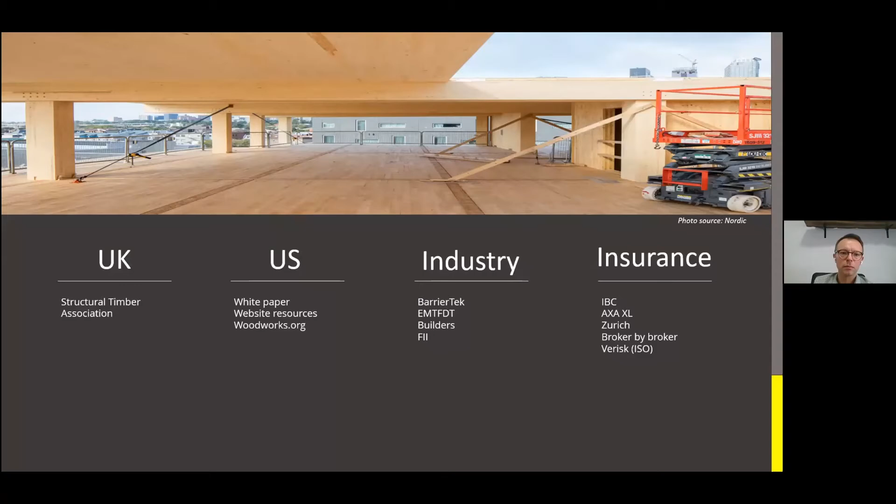So we launched the campaign and called it Insuring Timber, with the goals of engagement and education, and rolled out a Did You Know campaign on various social media channels, which was pretty successful. Just some facts and mythbusters type of thing that led to, for us, really good engagement on our social channels, and brought about some great contacts, which allowed us to move further down the road in terms of education,

again, promoting what we had on our website, and through a preliminary report that I put together with some consultant help called Insuring Timber, that highlighted the key areas and what we plan to do to address them, and continue to engage with industry through specific project meetings, which led us to the thought about how to take the next steps.

And having developed a bit of an inventory of wood-friendly insurance companies, we put together a very in-depth insurance think tank with the companies that you see below. It was a full-day interactive session where we spoke to underwriters, to brokers who are very familiar with wood construction, got their opinions, went in there with no preconceived notions, as did the insurers; nothing was off the table, so to speak, in terms of addressing this issue. So it was extremely helpful and brought about the following conclusions.

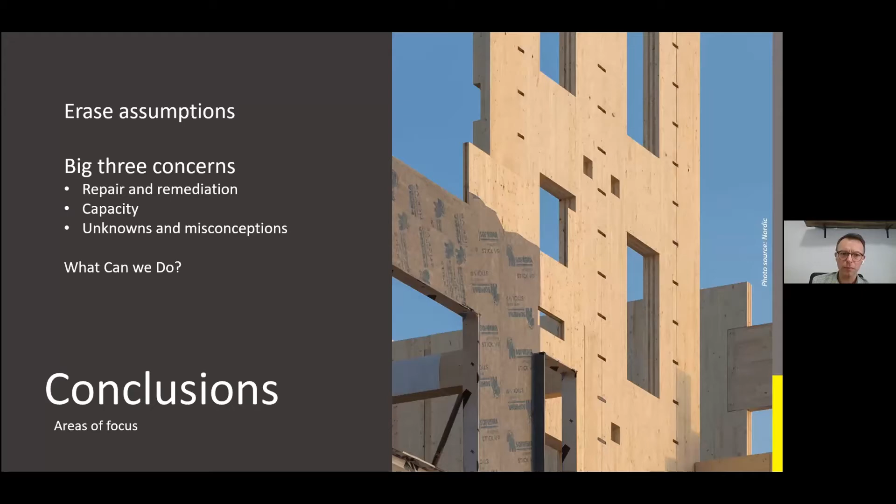So, speaking to insurers, isn't that a good thing? And it is. However, they don't have the data to make accurate conclusions. So as time goes on and this continues to be the norm where there are no issues during construction, then we can certainly use that as leverage. It's a very safe way to build, which it is.

In the short term, in phase 2 activities, we continue to be able to make referrals to some of those friendly companies and continue to hold different workshops with stakeholders and presentations to industry like this one. And the development of a best practices guide, which we'll talk about in a second, to bring about a more friendly application for insurance. And in the long term, we continue to make partnerships and rate reductions.

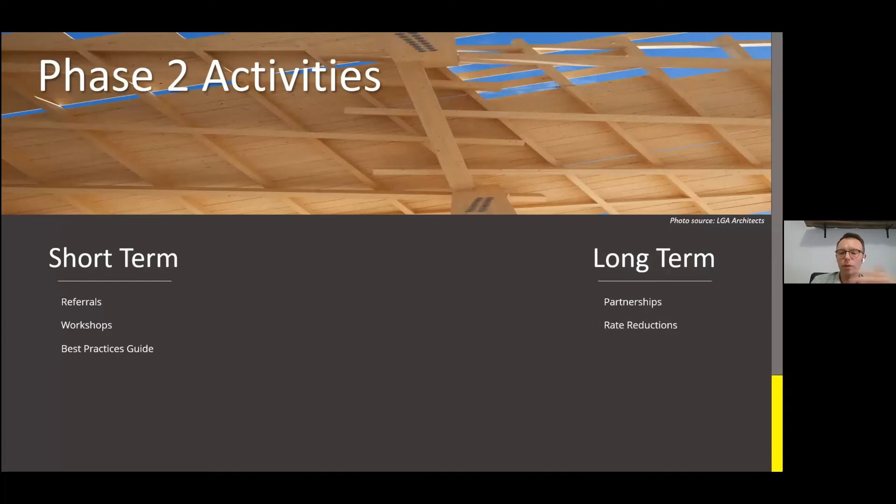So we talked about these misconceptions earlier, and Dan alluded to some: it's going to rot, or it's vulnerable to termites. That's the problem, right? Those termites are going to eat the building and it's going to collapse during construction or after. That's a real problem, but that's not it. That the wood rots, and that's the issue. If it gets wet, it's done. Like you might as well throw the building out. That's a real problem, but it's not.

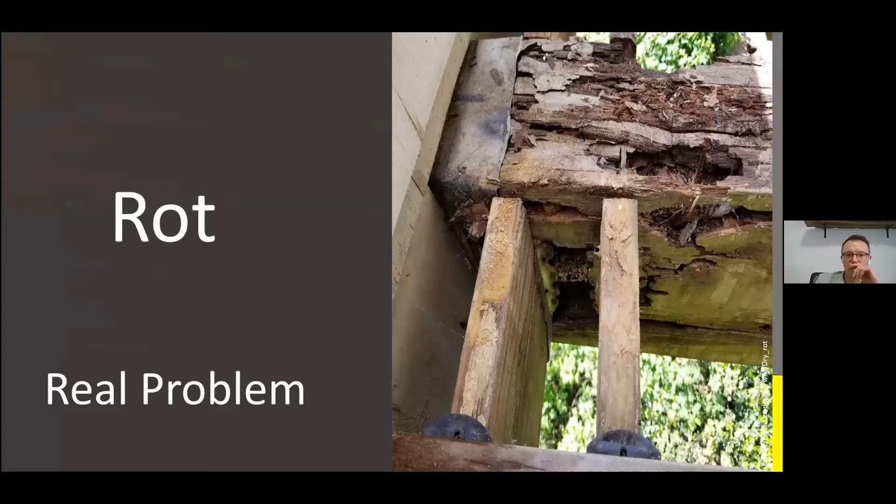Okay, well, maybe it's fire. That's the issue. Wood's vulnerable to fire. That's the issue, and if we can solve that, it's all good. But it's not true. The real problem when it comes to insurance is risk. And for now, timber is perceived as risky, and we'll get into it in a few slides. But in terms of historical data, you can't necessarily blame insurance for perceiving it that way.

Risky business for insurance is not a good thing. So that's why we put together a guideline for insuring timber in Canada. Building with wood is a lot different than it was 50 years ago, even 20 years ago, even 10 years ago. Prefabrication, modular construction, mass timber, these things did not exist.

Like, Dan's presentation mentioned glulam post and beam. And I've been around the industry long enough that it used to be called heavy timber or glulam construction before that mass timber tagline came along. So the structural systems have changed. It's unfamiliar. There's a lack of data. Everyone thinks that wood is wood.

Light wood framing methods are largely standardized throughout North America, with the quality of the lumber, the spacing of the studs, types of lumber used; they vary little between the types of buildings. Assemblies to achieve fire resistance ratings and sound transmission ratings are largely similar.

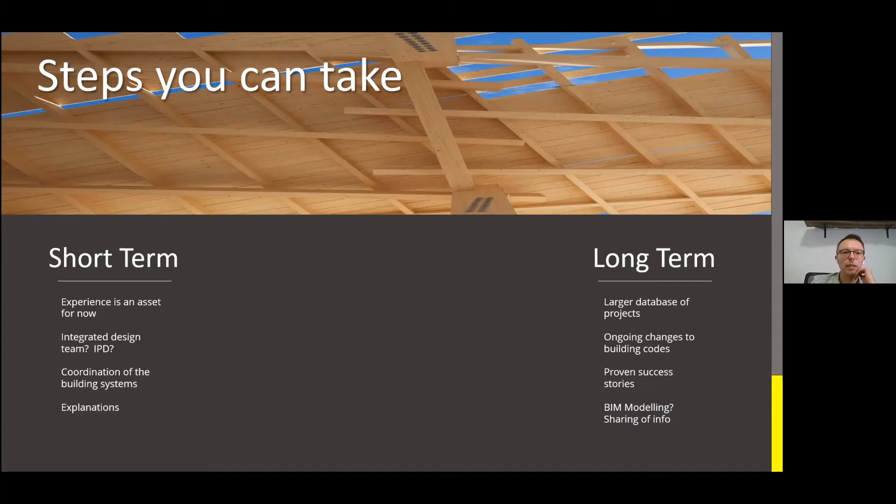And luckily for us, because this is a relatively new type of construction, we have many demonstration projects that are proven success stories with lots of information behind them to draw from, including fire safety plans, including moisture management plans that have been implemented. So just continue to share that info, and it goes a long way to alleviating the concerns of the insurer.

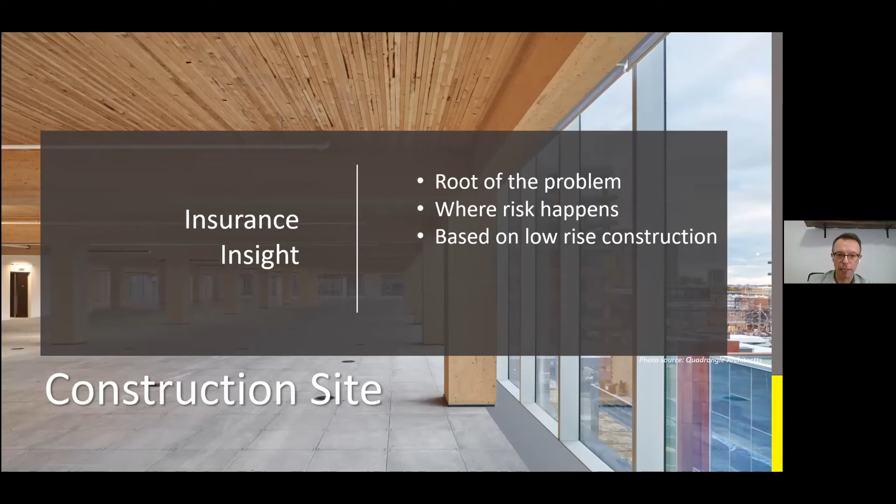The construction site is key, and this is what I alluded to: you wonder why rates are high, I'm about to show you. The site is the root of the problem. This is where risk happens. This is based on historical data of on-site built buildings where, you know, risk is not something that is even in the back of anybody's mind. We can change things like that.

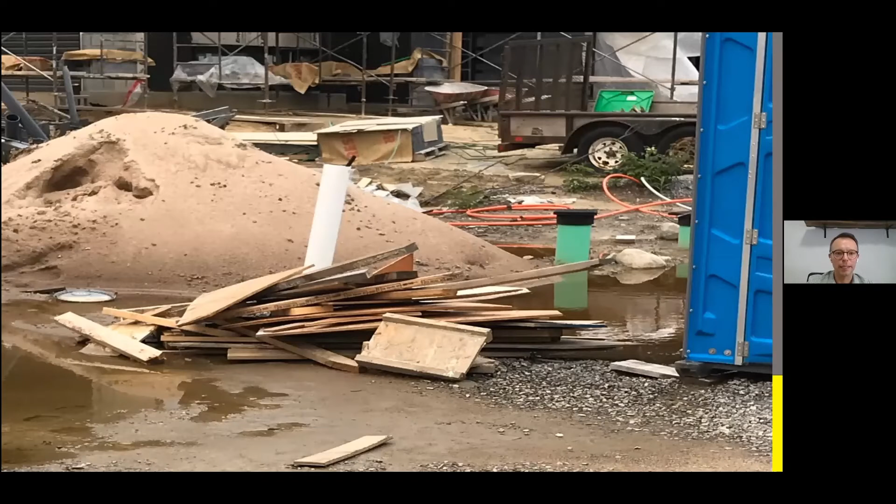And even today, going through a subdivision near my home, which I won't identify, but this is not uncommon, you see end cuts sitting in puddles of water piled up, like, it looks like a campfire waiting to happen. Why is this even occurring on a construction site?

I think somebody asked a question about rain falling on wood. You know, wood can get wet as long as it's allowed to dry and properly detailed. As we just saw, you can use these in bridges that last for hundreds of years if you design it properly. But leaving these risky types of materials just lying about doesn't make a lot of sense. You know, you've got a full bin here.

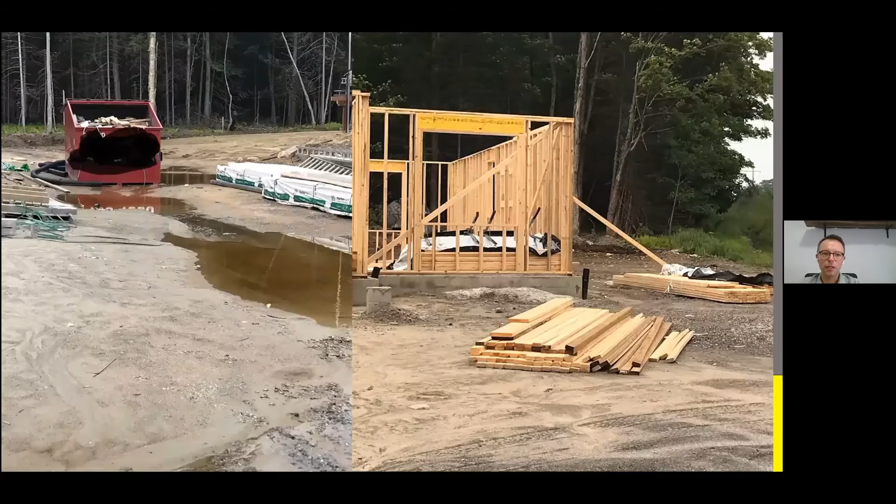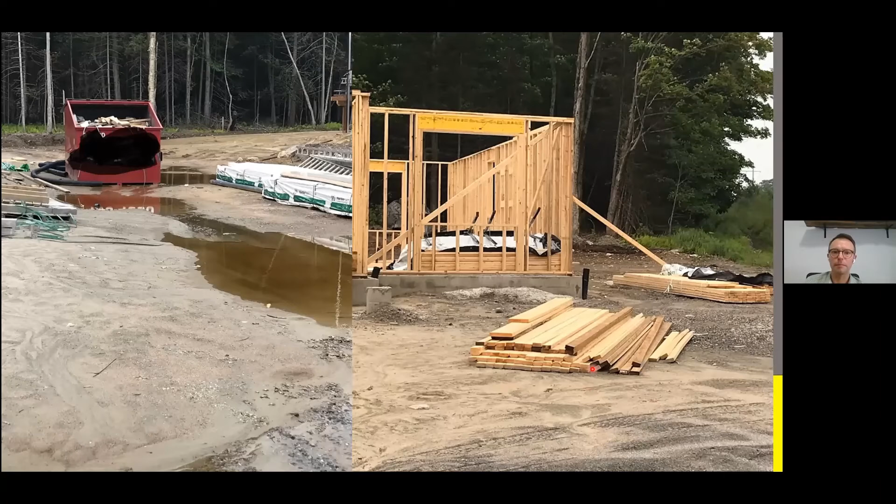This is on a Sunday, so it's sitting there over the weekend, open lid, risk waiting to happen. You've got your studs sitting in sand with a lot of moisture. Well, just simply putting these off the ground would make a big difference.

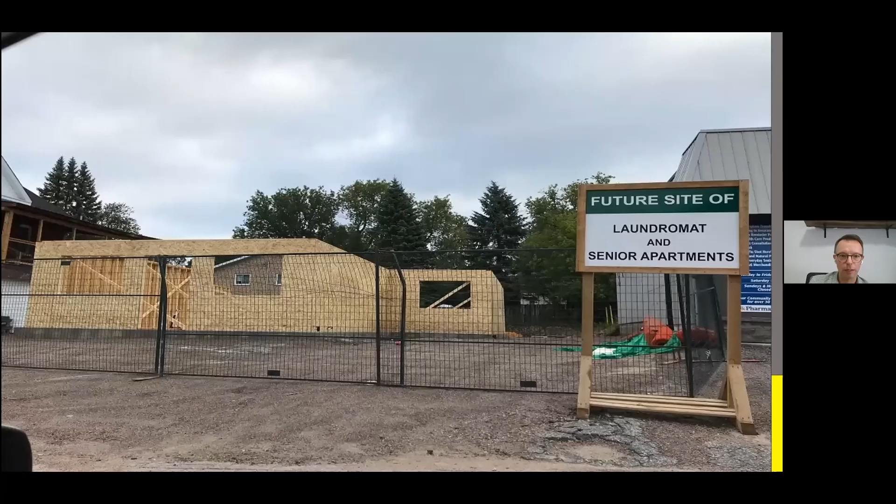Having some safety on your site goes a long way, instead of just leaving your materials about. Something like this, just simple construction fencing, looks a lot cleaner here than it does in the other example. And here's an example of a very clean site.

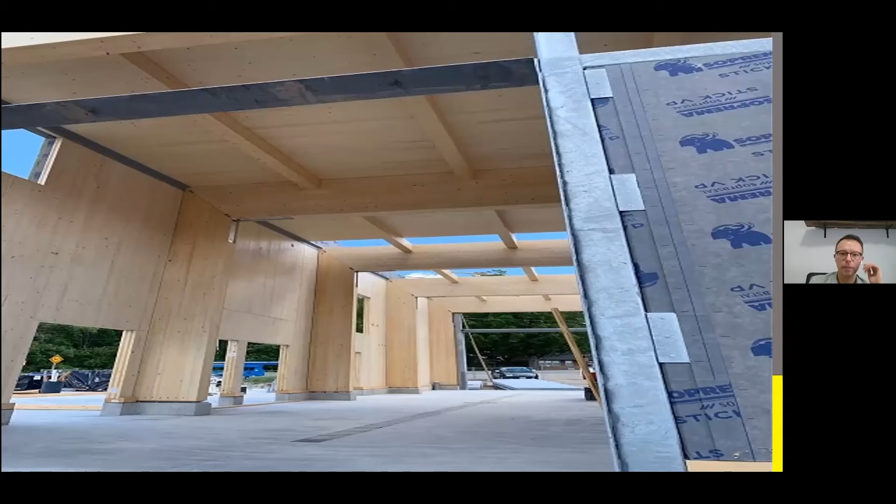This is a mass timber build where these prefabricated components really eliminate a lot of risk, because it arrives on site precisely cut, much like your kit of parts of Lego. You just assemble it together, reduce crew sizes. The more people on site, the riskier it gets.

Reduce end cuts. There's no waste happening here, so you don't have to remove things like garbage on a daily basis, because there is very little waste and very precise building components coming together in a very short amount of time.

So in the short term, construction site safety and security is paramount. Sometimes that's difficult on smaller sites to have the security that you need, but on larger building sites, it's certainly something that we need to address. What are you doing with your sprinklers on site? If your building is sprinklered, how fast are you getting them in? It should certainly be at the top of the list.

I have an example of an Ontario project where there was an unfortunate fire. Luckily, the building was not occupied, but the building was completely framed in October, and the fire occurred in February. This is a 5-story building required to be sprinklered, and it could have been activated in October, but the building burnt down in February as they were doing the finishing work inside, and the sprinklers weren't activated yet. Months earlier, the water was all hooked up, so it could have been the first step and maybe prevented that risk from happening.

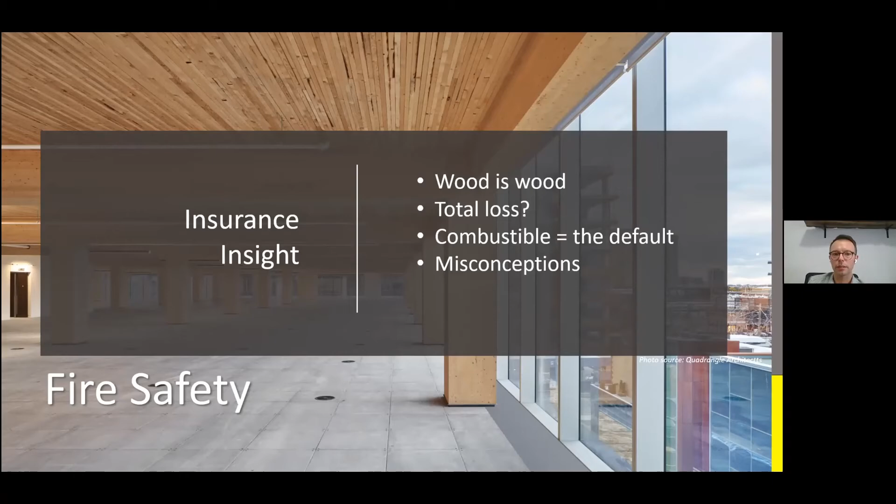And continued misconceptions around fire resistance: we can achieve those 2 to 3 hour fire resistance ratings and are required to according to building codes. Right now, the steps you can take is again explaining the system and what best practices you're doing, explaining your fire safety plan. And that's a key thing that you should have on a large construction plan. Have that fire safety plan, have distributed copies to everyone who's working on site.

Companies like CHM, like Steven Craft, who'll be presenting later today, all those fire consultants can prepare those plans for you and do so in terms of alternative solutions and even code compliant areas. They can produce that and have many templates for it. So something to think about.

And in the long term, the Structural Timber Association that I alluded to, they have programs where you register the site if there is a timber construction happening. It's registered with the local fire department, it's registered with other authorities, and they actually do random inspections to make sure that the site is functioning as it should to a high level of safety.

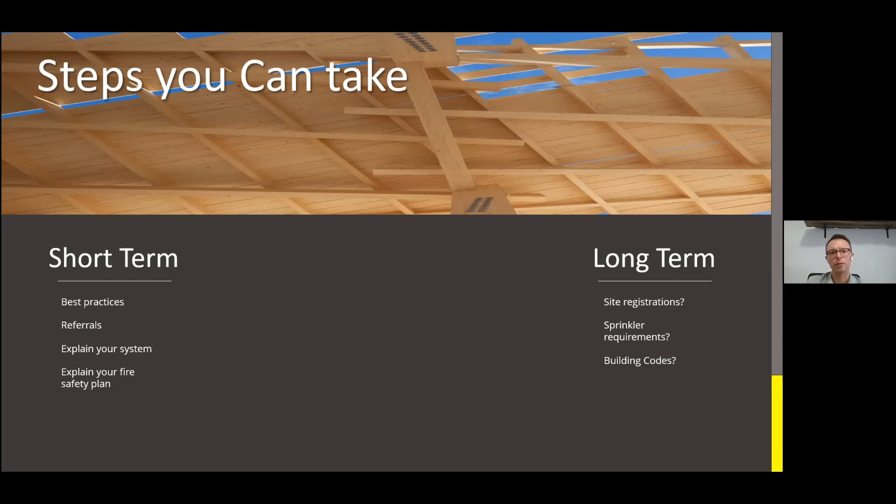Sprinkler requirements, continue to make sure that those are a high priority. And as building codes change in the long term, the greater the adoption, the more stringent these codes become, the safer these buildings will be during construction.

And along with fire safety, a large concern is water and moisture. In fact, of the top 3 claims for insurance, number 1 is fire. Number 2 is structural collapse, which blew my mind, that the number 2 amount of claims are from buildings falling down, which, I mean, a lot of structures aren't built with timber, but what kind of best practices are we working with in construction that more buildings are collapsing than are being damaged by water and things of that nature? So lots of improvement to make in all terms of construction.

But yeah, so fire, we can address that. Water and moisture is a little bit trickier. Surprisingly, this is not a rain issue. Most insurance policies assume that some type of rain will occur and that the builder is taking the appropriate steps to ensure that the timber dries, just as we mentioned before. It can get wet, just don't encapsulate it when it is wet. Make sure that it is allowed to dry. Get that roof on as soon as possible.

Temporary tenting over timber components is a good practice that you see in Europe a lot, not so much in Canadian examples. This project site tour I did in downtown Vancouver, where God knows how much that lot cost, was a CLT build, and it was using, in some areas, 9-ply CLT, which, as those of us in the industry know, is a lot of fiber, and fiber is where your cost comes from, that were sitting in puddles unwrapped. Very simple steps to take. Most of these things arrive on site wrapped. If you just keep them out of water until they're installed, or have them arrive just in time for assembly, it goes a long way.

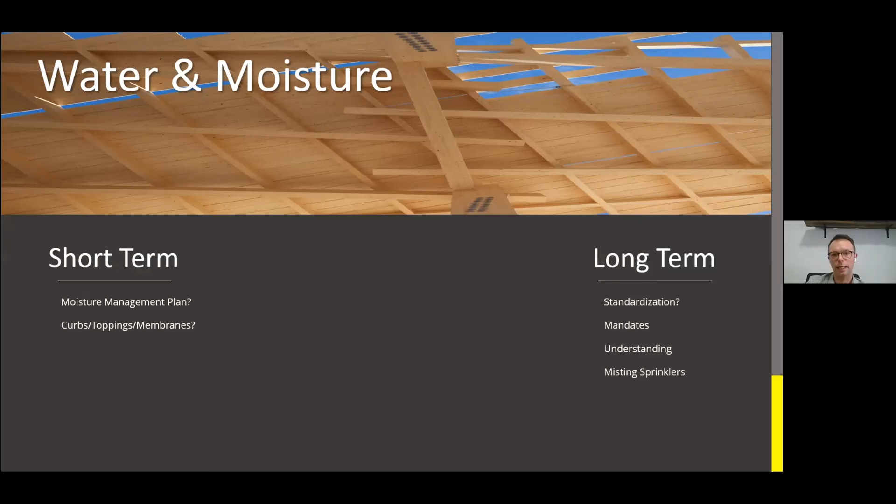And in the long term, we hope that this leads to standardization of best practices, certain mandates and understanding, and even things like misting sprinklers in wood buildings, which use far less water but are in some tests as effective at extinguishing fire, and can go a long way to helping dry out that area after that type of disaster event.

And again, for repair and rehabilitation, there's a lot of lack of data there, very few claims, but we continue to look at doing testing with some of our partners and publishing those results. FP Innovations and others are looking into that, as well as NRCan. So hopefully we can see some great reports there, and a few resources are available on our website.

But in the short term, talk strategies with your builder. What does your mass timber supplier suggest doing in case of an event like that? Can they supply a replacement panel? How do you go about replacing it? Is there a supply chain issue if your order arrives and one of the components is damaged? Are you at the top of the list for replacement? Just ticking off those boxes goes a long way to mitigating some risk there. So in the long term, we need more testing, we need longer term strategies, and we need examples of best practices in action.

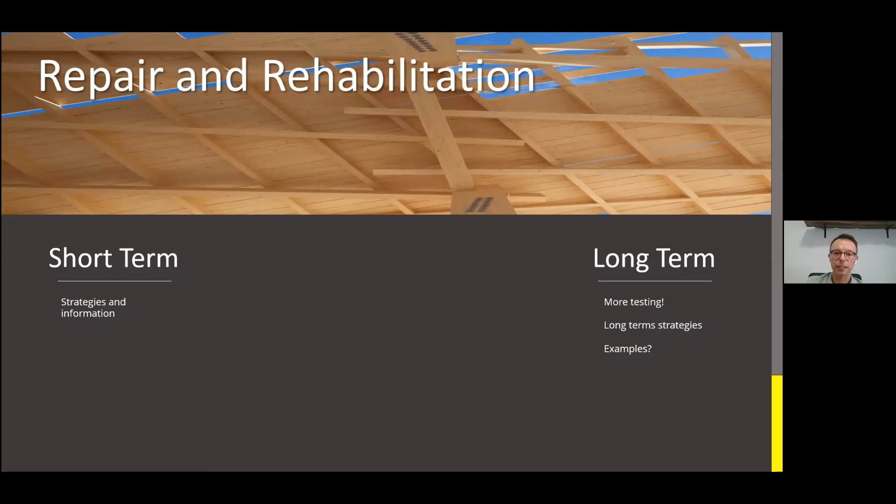And finally, in terms of insurance insight, what are we dealing with when it comes to companies? Are you a builder who traditionally does non-combustible, and you're looking to get into the timber world, but you're using the same company that has never insured a timber building before? It's not a great practice. You can shop around, you can talk to companies who are familiar, who are advertising themselves as wood friendly, which do exist, and we can help make those connections. And in the short term, we can follow our best practices, select the right brokerage, and manage building precedents.

When you go in and you're talking about what you're building, I mentioned the HoHo building in Austria and the Milwaukee Ascent Tower. And those are great in terms of publicity around the building. But an insurer told me the biggest mistake you can make when you're going to apply for insurance is leading with something like that. It's like, oh, I'm building the first mass timber building in Atlantic Canada. Their eyebrow is raised right away. What do you mean that's the first one? I want to be insuring the 100th one, so I know that it's safe.

So build your body of work, find precedents, even if it's not in the same geographical area. Insurance generally looks for a similar project in a 50-kilometer radius as to where you're building your building. So that's very difficult to find, even in places like British Columbia, a lot of examples of similar typologies to mass timber or multi-story wood. We're getting better and better as time goes on, but continue to look at that body of work.

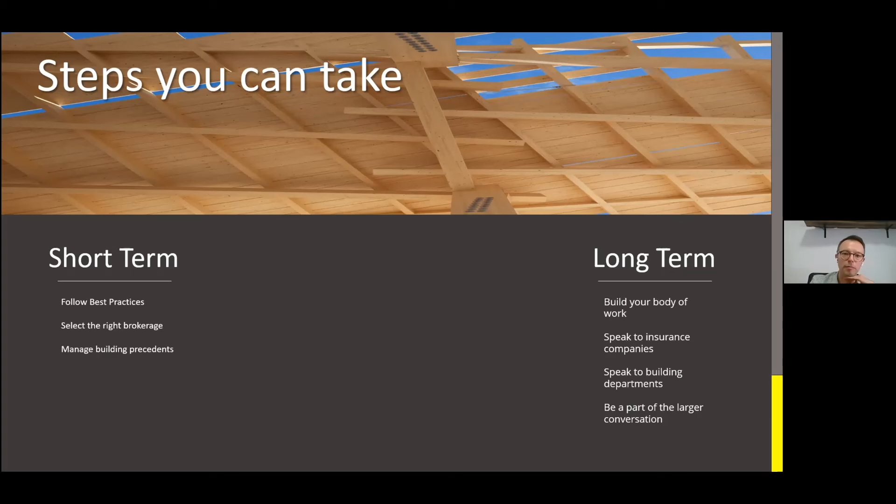And as more and more mandates come along for greener construction, for carbon neutrality, for reduction of embodied carbon, we don't want to have somebody interested in timber construction and then present them with roadblock after roadblock after roadblock until they give up. You want to make it as easy as possible. Codes are helping to do that.

You can see where we're headed with up to 12 stories in encapsulated mass timber. Fingers crossed that they're even looking into expanding that from Group C and Group D occupancies into Group A occupancies and other types of buildings to include those stories of encapsulated mass timber. And Canada is a leader in this type of construction.

The US now allows for 18 stories in mass timber construction, and they use the Brock Commons building in Vancouver as a template for a successful example. So a building that exists in Canada was used to change codes in another country, but hasn't yet been successfully changed up to 18 stories here in Canada. So we can continue to talk to AHJs and others to really change the tune and the perception of timber construction. It's a lot easier to find examples now, which is great.

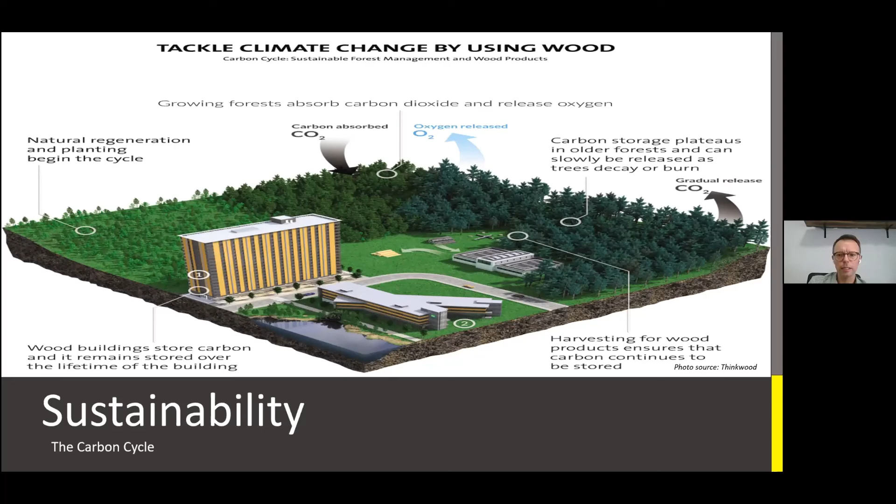And I think I did leave a few minutes for questions on this topic. But again, it's something that continues to be a work in progress. And there are some short-term solutions, but in the long term, all we do is build more timber construction and we'll get there. But we'd like to speed that up a little bit if possible.